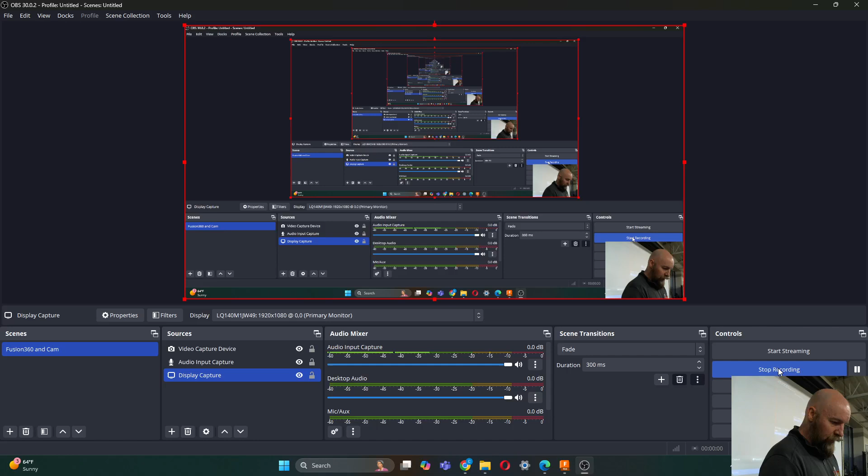Today we have a machining project in front of us. I backed a Kickstarter project and it came in the mail today. It's been a year of waiting for this thing to arrive. So we may or may not have more CNC projects in the future. I may or may not make you suffer along with me.

This is, you may recognize this pattern as the cheese grater pattern, they call it, from the front of a MacBook Pro or a Mac Pro. I think it's kind of a cool pattern, kind of interesting. And we can make it parametric for whatever kind of material thickness we have. So, that being said, let's jump in.

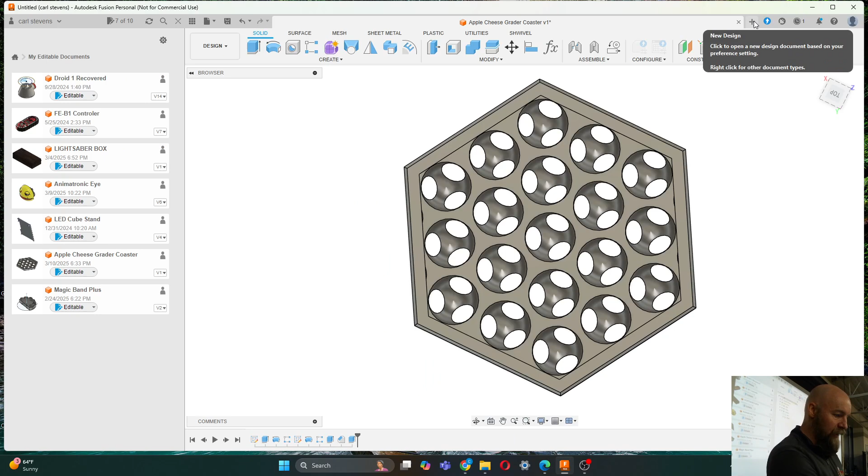I'm going to start a new document. I am going to start by making a couple of parameters, because I think it'll be helpful for us to have these right off the bat.

To make your own user parameters, you go to Modify, then scroll down to Change Parameters. We are going to make two user parameters. I'm going to click the little plus button to add a user parameter there. This first one is going to be called material, and it's just the thickness of whatever material we end up using. So I'm going to start with 1/2 inch.

And I'm going to leave myself a nice note here. It's the thickness, or maybe we should say it's the final thickness of the material, because when you're milling something down, you may start with a material that's thicker than 1/2 inch, but face it down to be 1/2 inch, so it's the final thickness of that material.

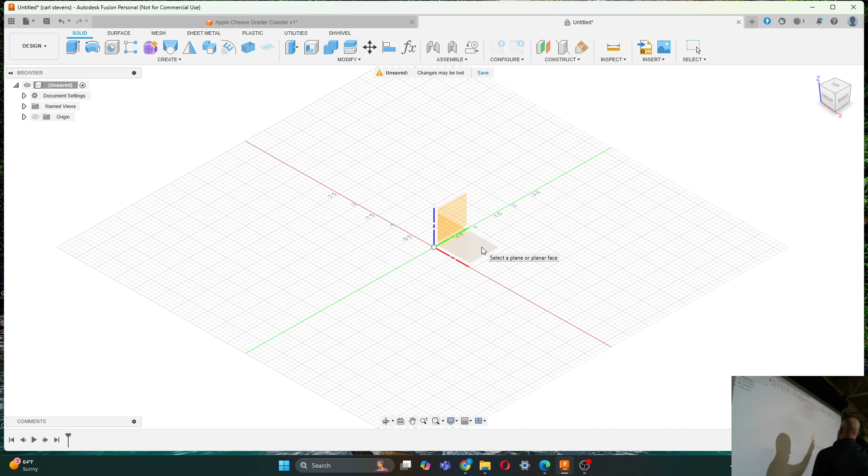When we know we're going to do things that are going to be cut on a CNC machine, it helps to orient things right away in the right direction. Your tool by default is kind of perpendicular, parallel to the Z-axis here. So if we draw on our top plane, in between our green and red axis, kind of a top-down thing, then we'll orient things in the right direction right off the bat. It'll save us a little step when we actually go to generate some G-code here.

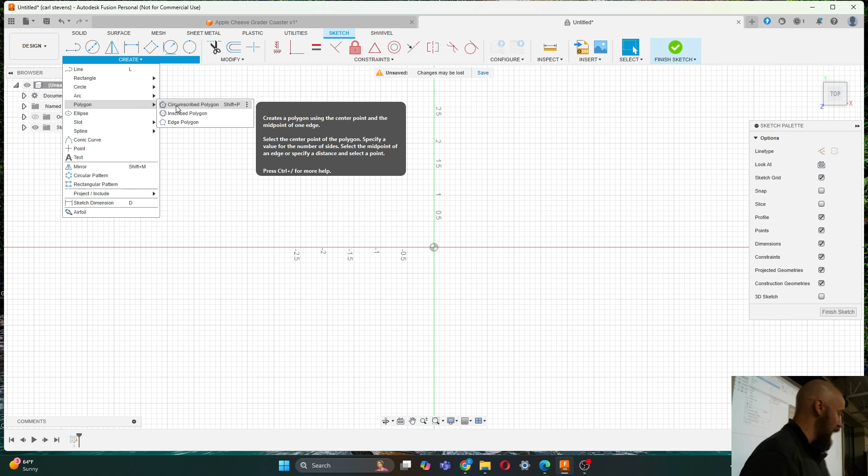All right, so now let's start by creating a polygon. We're going to make a circumscribed polygon. So we'll create polygon, circumscribed polygon, and I'm going to create the center of that polygon in the center of my drawing world. I like to have things fully constrained, meaning constrained in dimension and in location. The only way to do that at the beginning is to constrain things right to the origin there. And then the size of this, I'm imagining this being like a coaster, a cheese grater style coaster, or trivet, I guess, one of those two.

So let's make it like 2 1/4. So it's circumscribed? Yeah, circumscribed. That means there's a circle on the inside of this that is tangent to all 6 sides of our polygon.

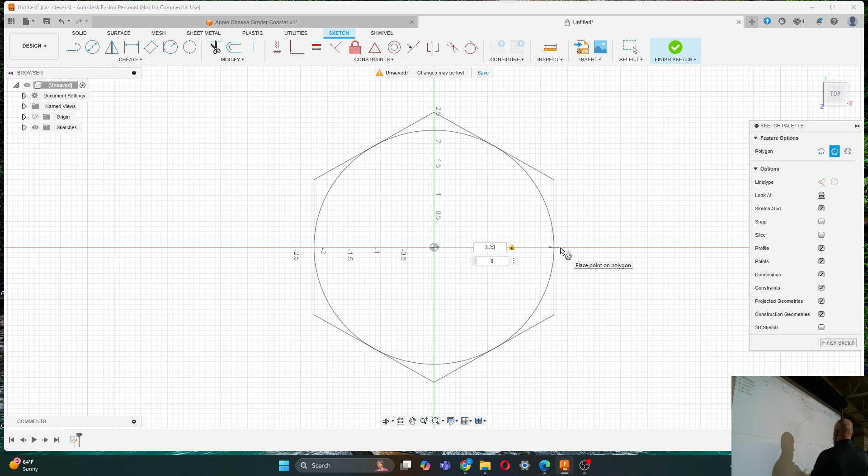The other type of polygon is an inscribed polygon. An inscribed polygon would refer to the distance between the furthest point and the center. So if we draw the circle around the outside, touching all the points, that would be an inscribed polygon. And 6 sides is indeed what is good for us.

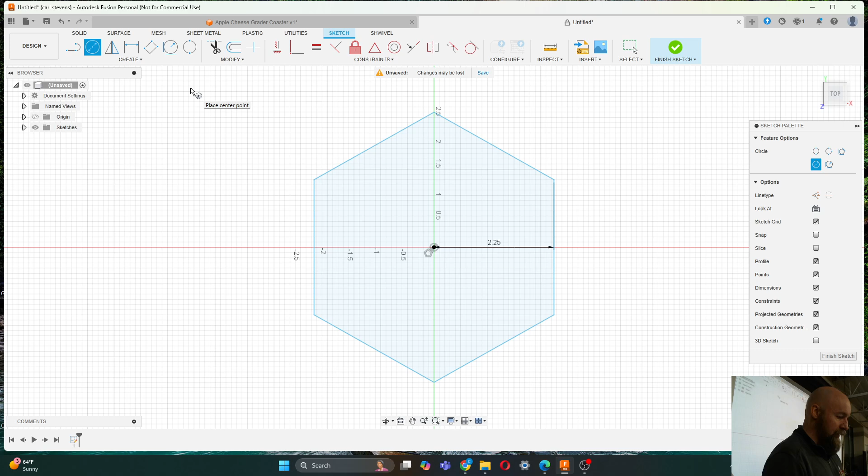And I'm going to hit enter. All right, cool. So let's, in the center of that circumscribed polygon, concentric on that center, let's draw a center diameter circle. This center diameter circle is going to be concentric on our center circumscribed polygon, so it's also going to be right at our origin. And here's where we can start driving our sketch with our parameters that we entered.

So we want our circle to have a diameter of our material times 2, minus our offset. So it's the material, and the multiplication is the star, above the 8. It's like material then star, no space. Correct, yeah, no spaces. So it's the material times 2 minus our offset.

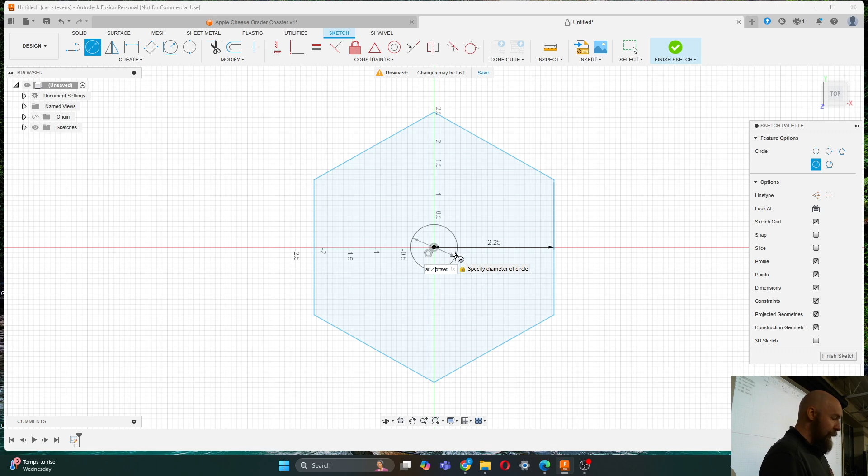The offset in this case is like the thickness of the material that's left over at the end. Maybe I'll wait to describe this until the end, what that offset actually does. And then we'll be able to push and pull it around. Cool? Yeah, so the material times 2 minus the offset. And that gives you 0.875 in this particular instance, with our material and our offset the way it is.

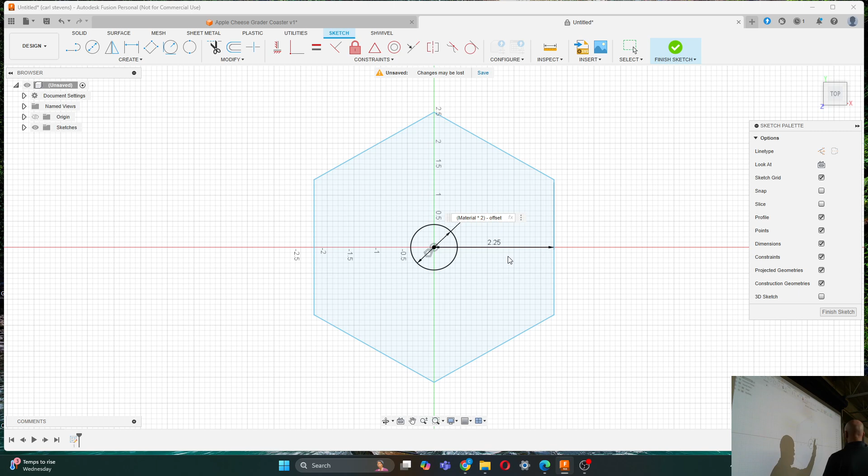But even though it says it solves that problem for you, you can double click on it and it brings you back to your equation here. You can also enter parentheses in these equations if you want to, like if you want to control the order of operations, so you multiply first and then subtract. I think multiplication always comes first anyway in order of operations, so it's not a necessity in this case, but there are cases when you want to force one thing before the other. That's not the case here—we don't need it to do one thing before the other.

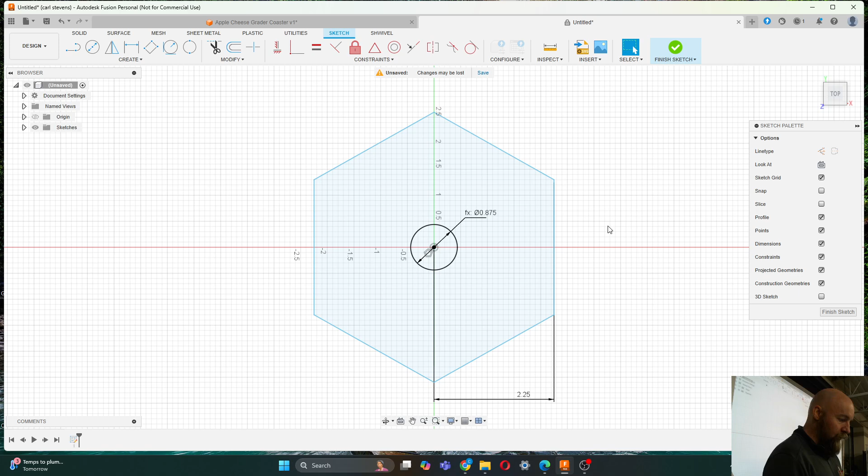All right, and then I'm going to hit enter. Now we need to draw some lines. So eventually we're going to make a pattern using this circle, a rectangular pattern, but in a rectangular pattern you can define the axes that you're going to make your pattern in, and we want to do that now. So we want to create a couple of lines that we will use in our next step to define the direction our rectangular pattern takes.

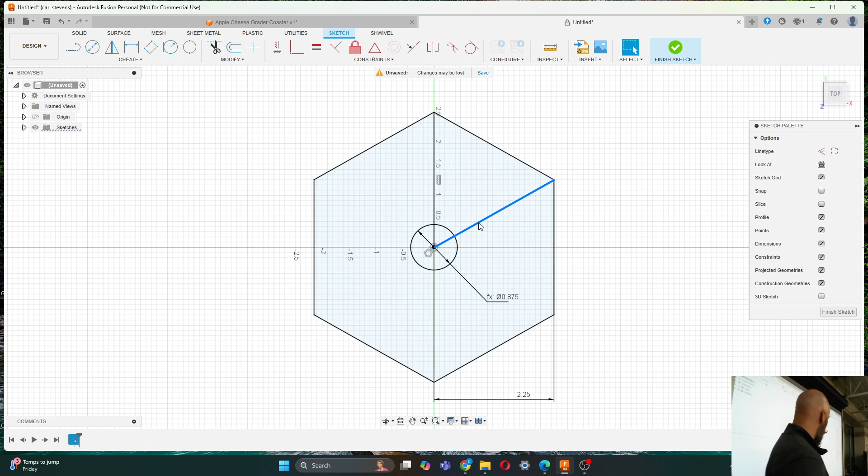So from the create menu, let's grab our line tool, and I'm going to draw two lines, one from the center point over to this corner in the right upper side there, right-ish quadrant, and then one that goes straight up to the top. And I'm going to make both of those lines construction lines because I don't want them to divide up my shape.

So I'm going to click on the line, and I can hit the X key on my keyboard, or I can click on the line and change the line type in my sketch palette over there. Over in the sketch palette, we can click that little construction button there, and that'll turn into a construction line. That way that shape is no longer bisected by those lines.

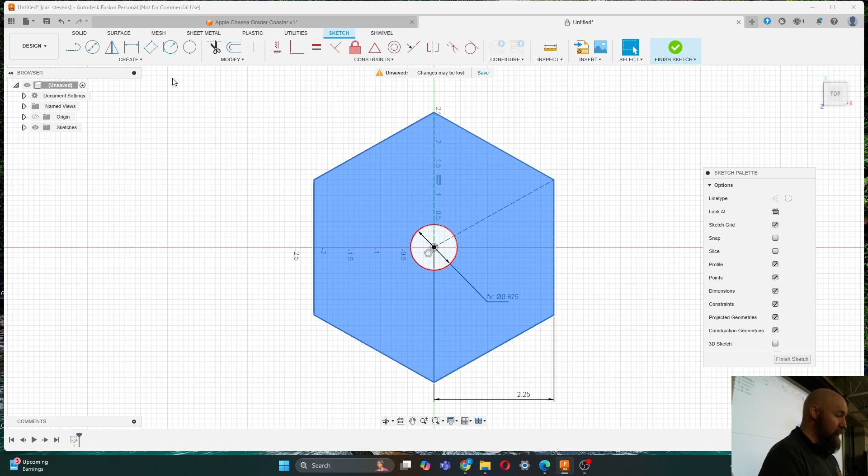Next, from our create menu, we're going to choose that rectangular pattern option. So we'll say create rectangular pattern. I'm going to make a rectangular pattern of our circle. Now you can see by default it gives you these two arrows, but we also have a select button over here, and this select button will let us choose the directions that we want our rectangular pattern to be in.

And that's our two construction lines that we drew. It's kind of a weird name to call it a rectangular pattern because we're definitely not making a pattern that is a rectangular shape right now. This is just a pattern. It's just the pattern tool, man. Don't put labels on things, man. Don't put my pattern in a rectangular in a box. Alright.

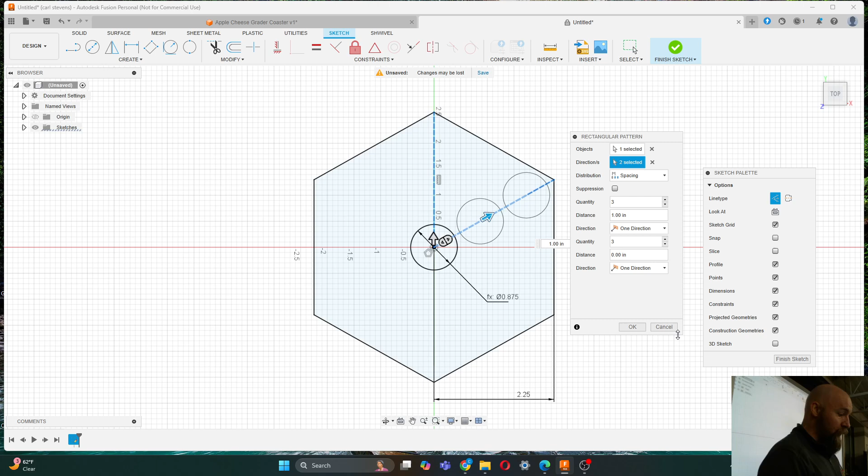So we're going to make a pattern, and here again we want to make this parametric. We want to drive everything by the parameters that we chose. So I've got my distribution type set to spacing, because we want to control the spacing between each one of these. I only need to make a pattern of 2 in this case.

And the spacing distance here, we're going to drive with that parameter we made, which was our material times 2. We're going to do that same distance for both of the directions, so it's the material times 2.

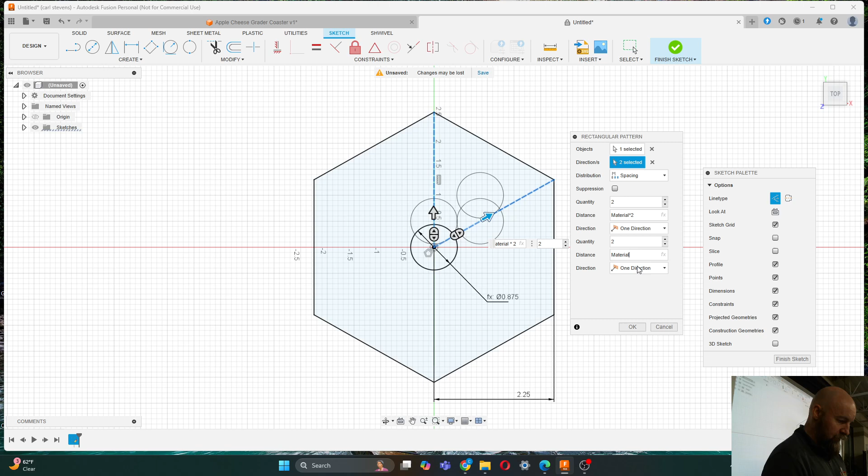Alright, and we're going in one direction. Happiness so far? So far, so good. I'm going to go ahead and say okay.

Alright, so the only reason we made this pattern is because it was the only way I could figure out how to find a point that we need. We're going to make a circular pattern on this side, and we want to make the same circular pattern on the other side, but it needs to be offset, so the center of the circle is now at the center where this triangle is here. The only way I could figure out to do this, as I was prepping, is...

I'm going to draw a triangle connecting these dots. So I'm going to grab... actually, let's try to make a triangle. I wonder if we can do that.

What about the circle thing? The tangent circle? Oh, that's a great idea. Can we make a circle that just hits those 3 points? 3 tangent circles - I've never tried to make a tangent circle with points before. Does that work? Can I? No, I can't click the points. But I don't need to, right?

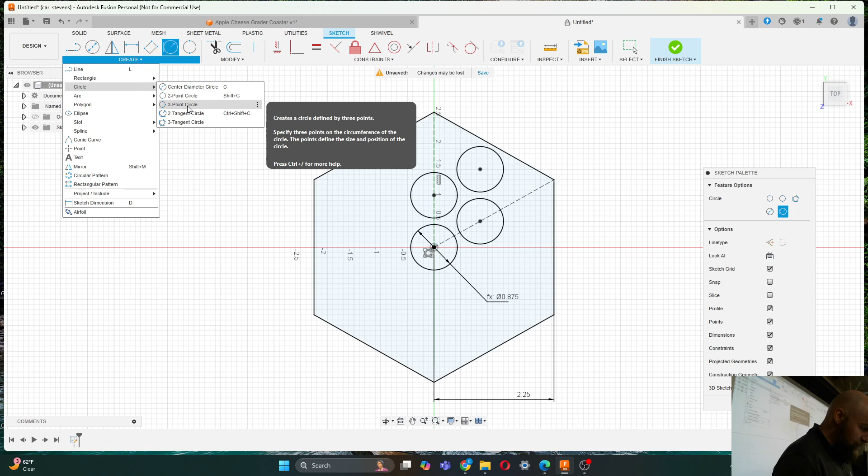So in circle, if we click 3-point circle, specify the 3 points on the circumference of the circle - the points define the size and position of the circle. Love it. So if I choose that point, and that point, and that point - yeah, beautiful.

Let's make that circle a construction line, because we really just need the center point, and we just need the center point for the other side when we eventually draw the other side.

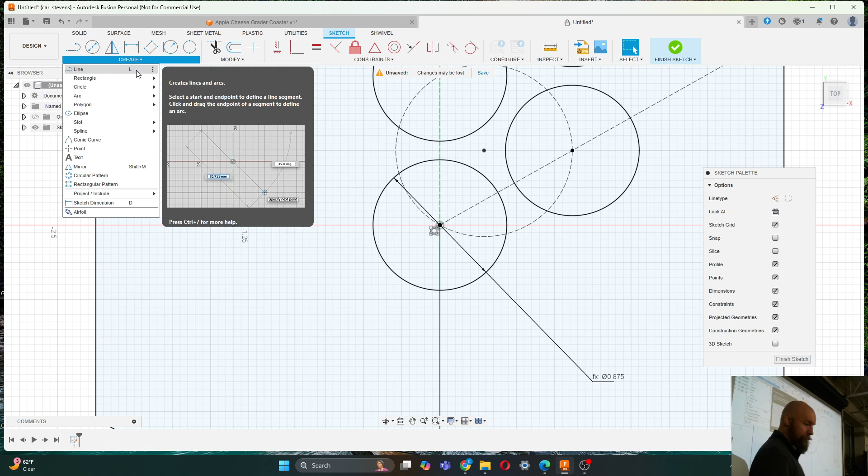Okay cool, the last thing we need to do here is we need a line that divides this center circle in half. The way I've been doing this when I need it is I grab my line tool and I draw a line that is definitely not down the middle of this circle.

But I do have my horizontal/vertical constraint popping up, so there are 3 things that I know about this line. I know it's always going to be connected to the top, to this circle up here. It's always going to be connected to the circle down here, because I've got that little blue X. And it's always going to be straight vertical. So those are the 3 things I know about this line I'm drawing right here.

Now I can click and drag on this line. In theory I should be able to click and drag on that line, but it won't let me for some reason - there we go. I click and drag on the line, and those 3 rules I was telling you, I can verify that they're true: it's staying straight up and down, and it's staying connected at the top and staying connected at the bottom.

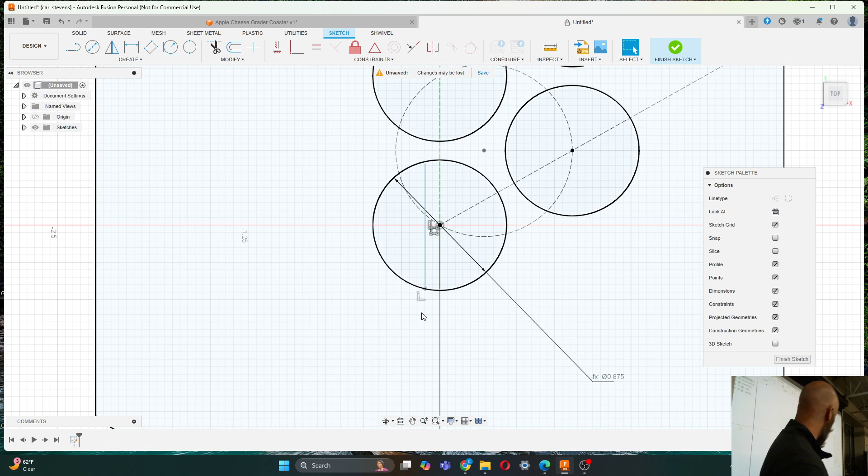But I want it to go right through the center, so I'm going to take this line here and add a coincident constraint. From the constraints menu, if I choose this coincident constraint, and pick the line I want to be coincident to, and the point I want it to be coincident to - now I get a line that perfectly divides the circle in half.

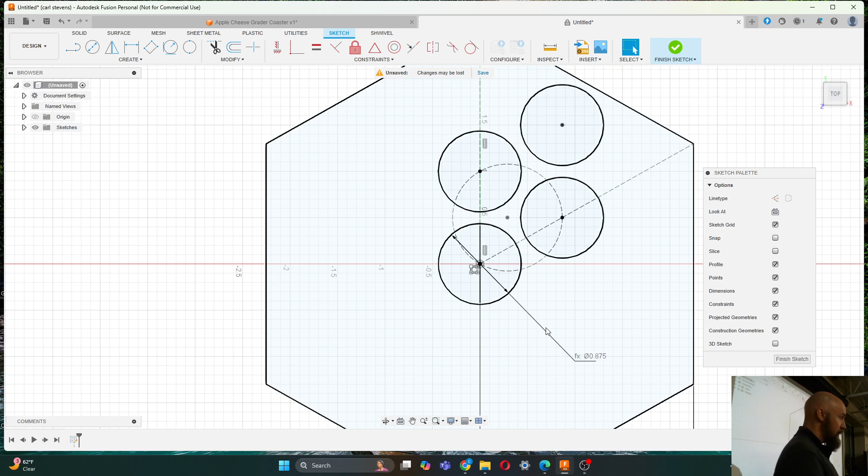Sometimes what I would do is draw a line from the center point down and make sure the line is straight vertical, then draw another line from the center point up and make sure that's straight vertical, but now it's just one line. Many ways to skin a cat, but that's the method I've been using recently.

Alright, questions so far? Cool, alright, I'm going to say finish sketch.

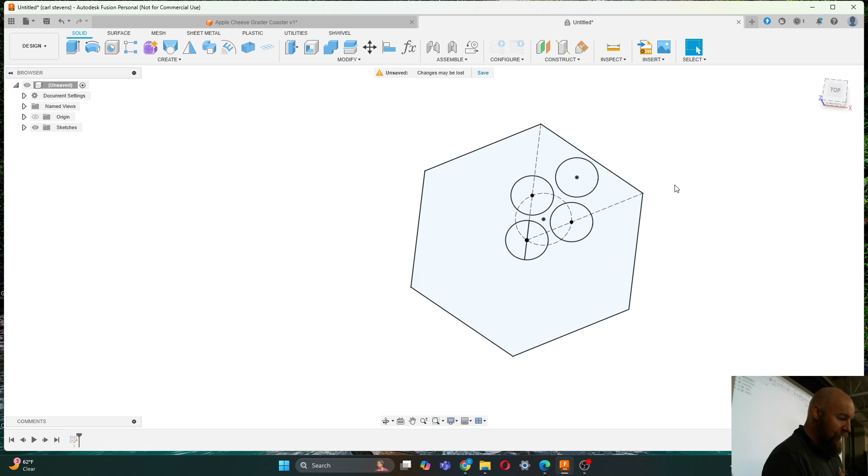So now let's extrude out our shape. From our create menu, let's go ahead and grab the extrude tool. We're going to extrude everything, so I'm just going to box select this whole thing.

And we are going to extrude this. I want to extrude it away from myself because I want to have this sketch... I guess it doesn't matter. As long as we draw our next sketch on the opposite side of this body that we're making, then we're good.

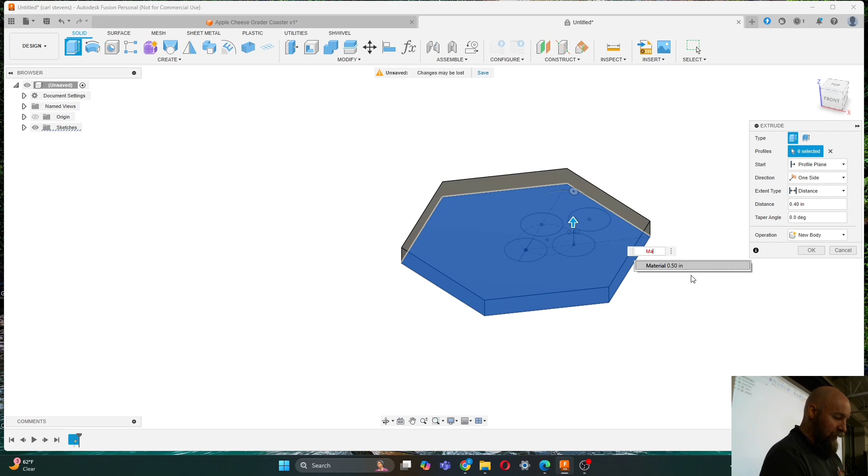And our body is going to be a thickness of material. We're making it a new body. And again, it doesn't really matter - you can go negative material or positive material, either one is fine. And then I'm going to say OK.

All right, so let's create our funky pattern on this side before we flip it over and do the other side. From our create menu, let's go ahead and grab the revolve tool.

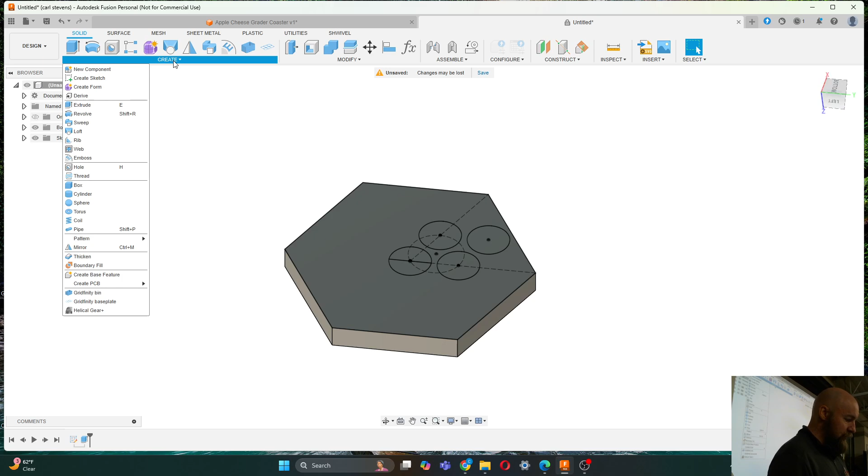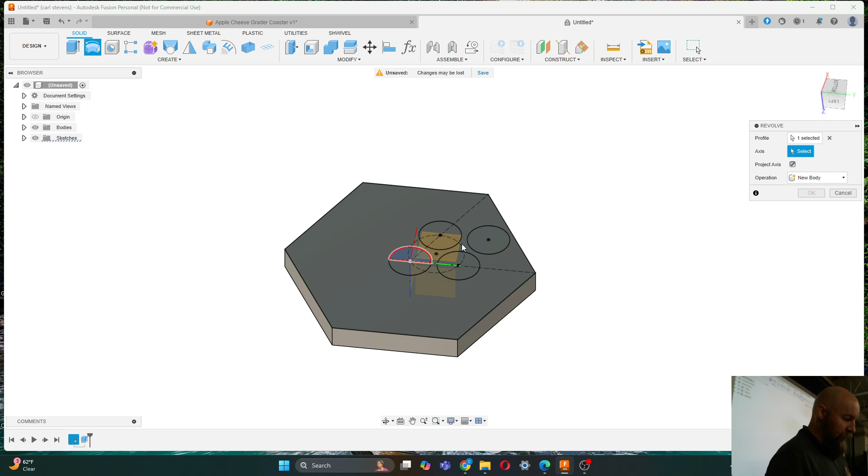The profile that we are going to revolve is going to be half of our circle that we cut in half. And the axis that we're going to revolve it around is our line that we used to cut that thing in half.

And here, I can look at this sideways now, and you can kind of see this distance here - this is our offset. So if we would have just done the material times 2, this circle would come down and be tangent to the other side of the material, and we want that little bit of thickness spacing left in there. So that's our number that we can play with to make that thinner or thicker.

All right, and I'm going to say we're making a cut.

Are you good? You just lost me. Oh sorry, yeah, here - hang on, I have the bottom of the thing.

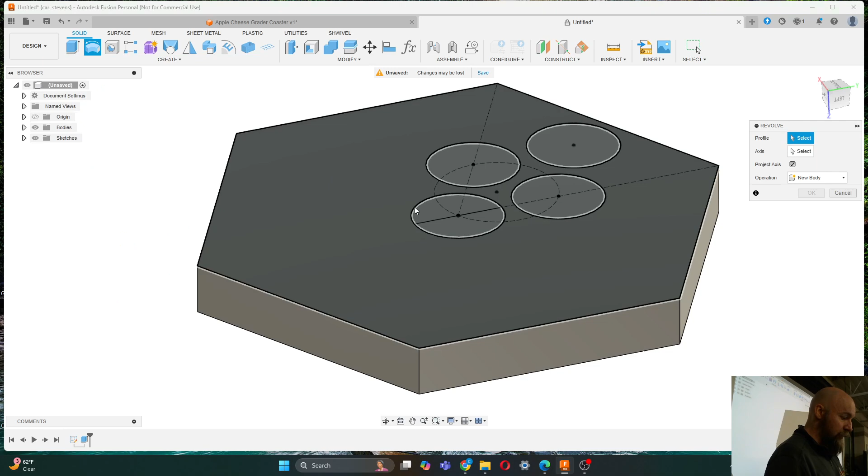So then we go to create, and then revolve. Create, revolve, fine. And then I pick half of my circle... an axis. And then the axis is going to be that line that divides our circle in half. And then as long as we're cutting, then we can say okay.

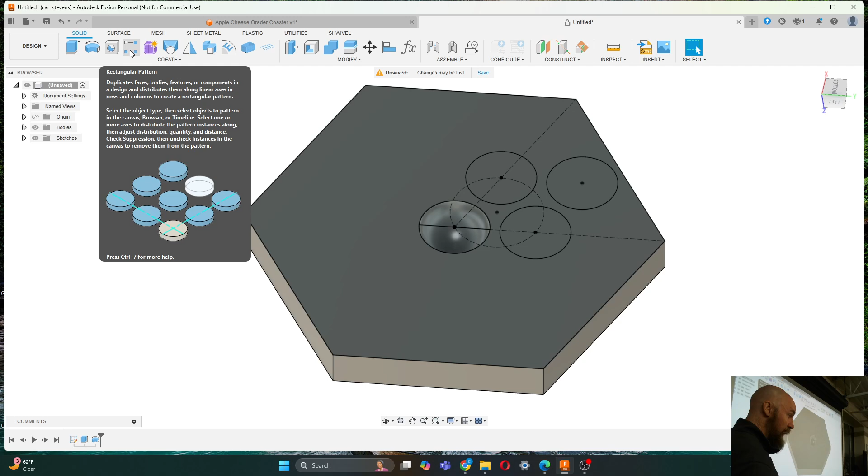And it is definitely my preference to use the pattern tool out here in 3D land versus using the pattern tool in 2D land, because when I use the pattern out here in 3D land, I get an icon that appears down in my timeline. And when I can make an icon appear down there, it gives me something I can edit later, because I'm definitely going to change my mind - it's just how it works, right? So if I can do things that give me points down here in my timeline that I can control later, I would always choose to do it that way.

So from our Create menu, I'm going to grab my Pattern tool - again, it's the rectangular pattern tool. We are making a pattern that is an object type of features. A feature is the thing down here in our timeline. So this is our feature timeline down here at the bottom.

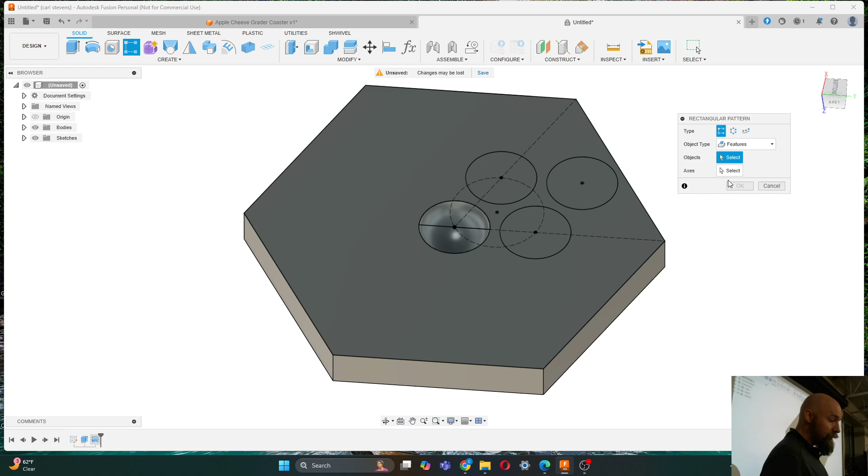You can attempt to pick the feature by hovering your mouse over your drawing view out here and trying to highlight the feature you're going to click on. You might have to hide your sketch in order to do that. But I prefer to pick the feature in the timeline down here, so I want to make sure I'm picking a feature down here. Sometimes when you pick a feature out here, you may not be picking all the features - you may just be picking some faces of the feature.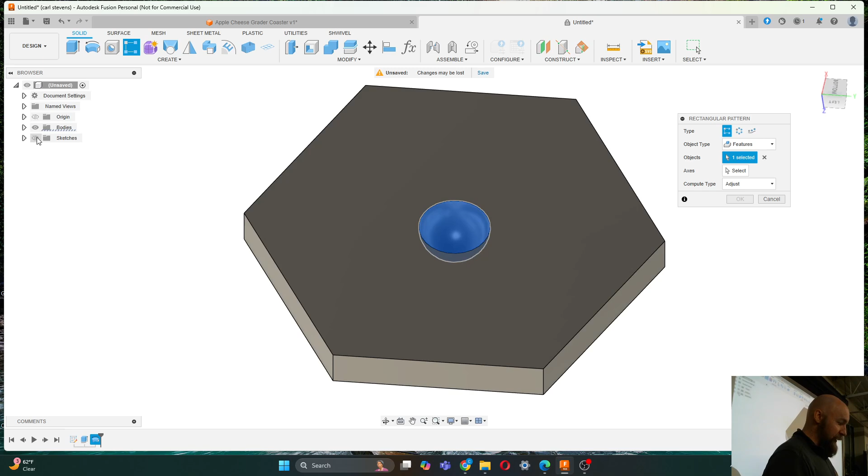So I prefer to pick the feature I'm making a pattern of down in the feature timeline here. And then I'm going to turn my sketch back on because I need to see these lines, our construction lines that we made, because we're going to use them again as the axes for our pattern. So if I click on axes, and I choose those two lines as the two construction lines as the direction I'm making my pattern in.

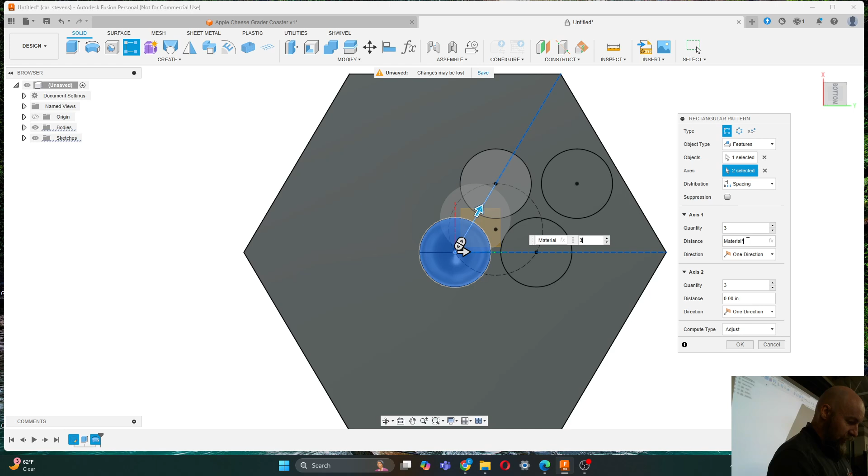Our pattern distribution type is set to spacing as opposed to extent. We want to be parametric about this, the same way we made our pattern to begin with, where we set a distance that is based on our material times 2. That is going to be the distance for both directions of both our axis 1 and our axis 2.

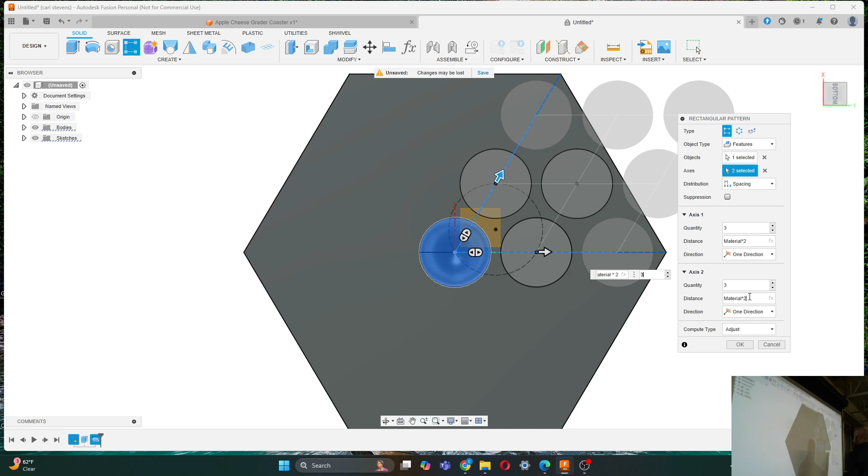Right now this pattern is kind of shooting off towards one side, and we actually want to make the pattern over this whole thing, the whole kit and caboodle. So for the direction of each axis, we set a quantity, a distance, and a direction. Our direction is going to be symmetric for both, and that'll expand our pattern outward as we add more quantity. I think I have to go up to 5 on both of these, and that covers my shape.

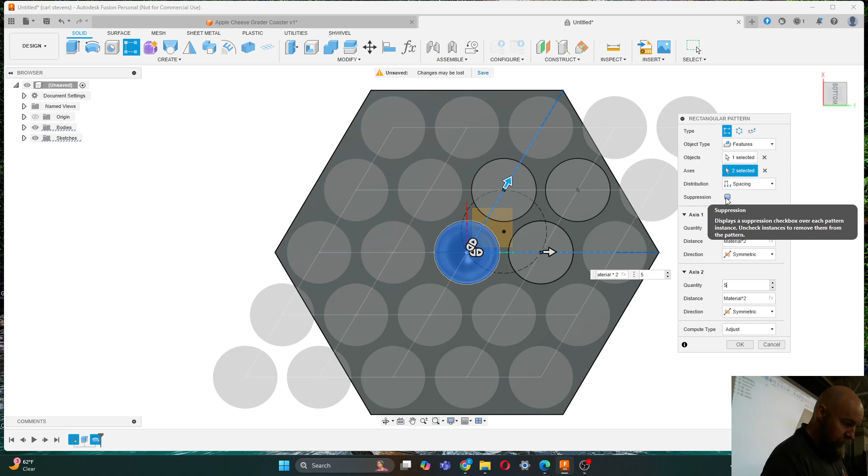You hit the suppression button. I did not, I actually don't know what that checkbox does. What does that checkbox do? That lets you turn off some of the examples. Oh cool, hey we should do that, because we don't really need these out here, we don't really need these out here either. In fact, maybe we want to try to avoid making little cuts away. I've never done that before, I've never even noticed that suppression checkbox over there. Neat, I'm learning stuff today, you guys could come up here and teach.

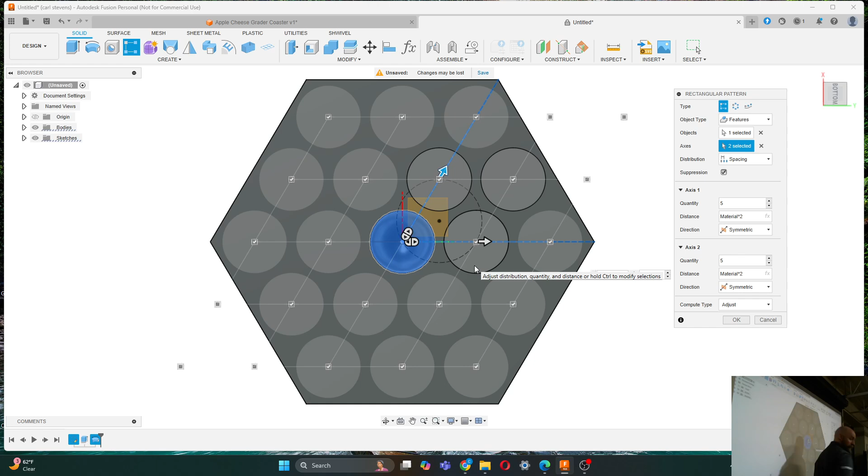If I say OK, I'll mention before I say OK - sometimes when you're making a pattern and you click OK and go back and look, you're like, where the heck did the pattern go? I can't exactly tell you what this compute type does, but sometimes when the pattern fails, you still get an icon down here that it thinks it succeeded, it makes you a little pattern icon, but the pattern doesn't actually show up. You can come back and try changing your compute type from adjust to something else, like optimized or identical. Sometimes just changing the compute type will make your pattern successful if it fails. It worked for me, hopefully it's working for you guys too. Two thumbs up, cool.

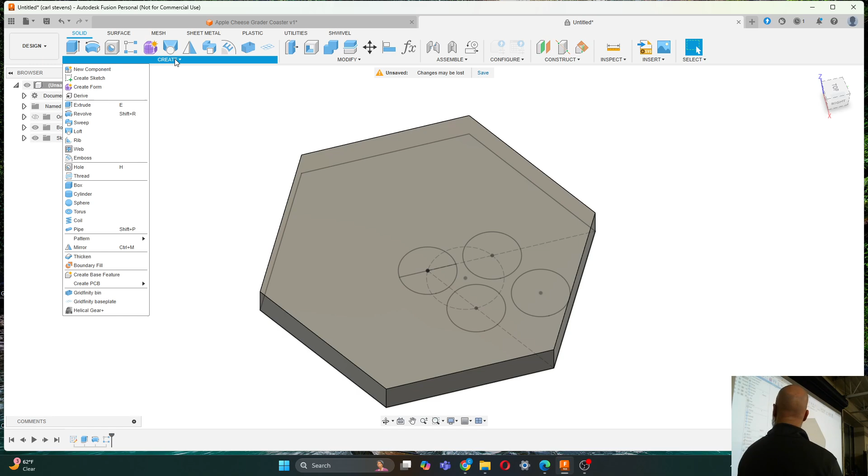Now let's make this pattern on the other side. I'm going to rotate my body around so I'm looking at the side of my shape that does not have a pattern on it. There's no pattern on this side, there's no sketch on this side. From my create menu, I'm going to create a sketch on this opposite face, right on the face here.

I need to bring over some geometry from the other sketch onto this sketch - primarily and only this point that we made that is in the middle of our little triangle of our three pattern circles over here. So from the create menu, I'm going to grab the project option, project include, and then over to project. I'm going to hover over the little dot that is the center of that construction circle, and it'll highlight red. If I click on it, it turns purple and tells me in my project window that I've got one selected there. Then I'll say OK.

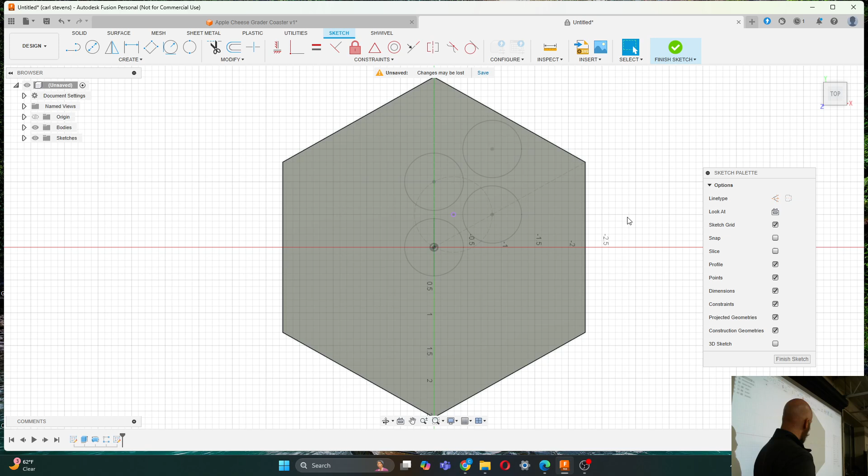Now the only thing we need to do on this, we need to do two things I guess. We need to draw a circle, so we're going to make our center diameter circle, and that center point is going to be right on that point that we projected over. We're going to make it the size that is material times 2. Then I'm going to hit enter.

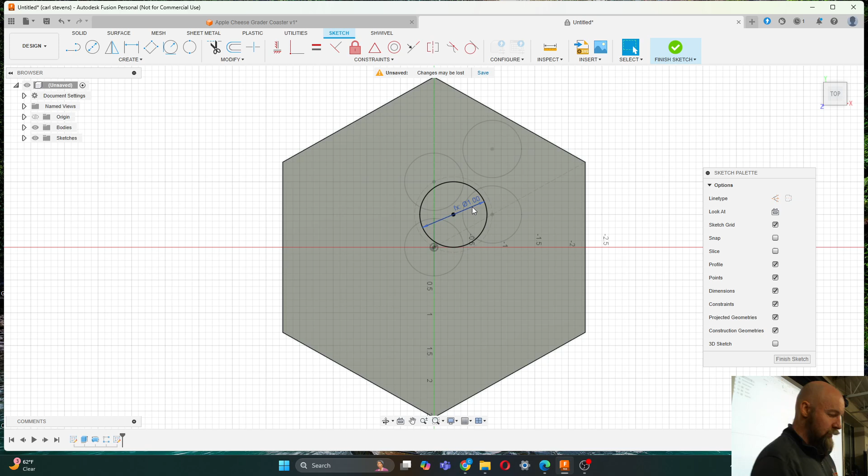Then we just need to do our trick where we divide our circle in half, because we're going to need to revolve this again. So we need a dividing line that cuts it in two. I'm going to grab my line tool. Yeah, times 2.

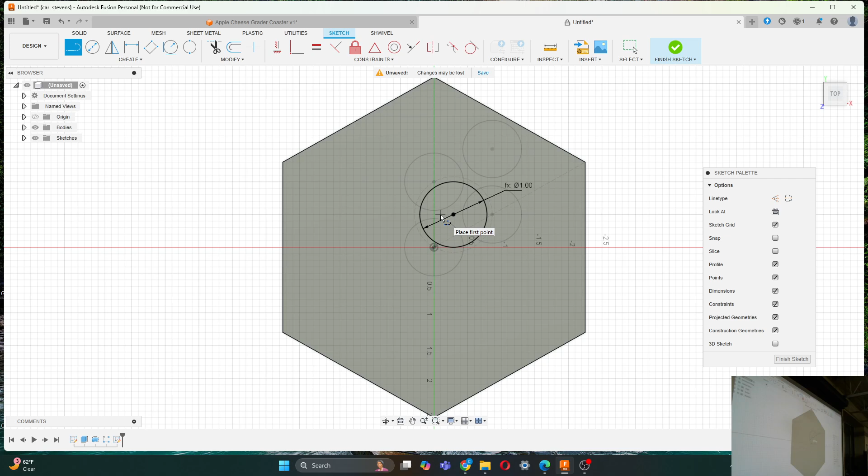And then we just have to divide our circle in half here. So I've got my line tool. I'll zoom in so we make this nice and big on the screen. Might as well take advantage of all that screen real estate.

I've got the little blue X, that's telling me I'm going to add a coincident constraint. So I'm making this line, the end point of this line is going to be coincident on this circle here. And then if I move my mouse down, here I get the two other constraints I'm looking for. I get my horizontal vertical constraint, and I get my second coincident constraint.

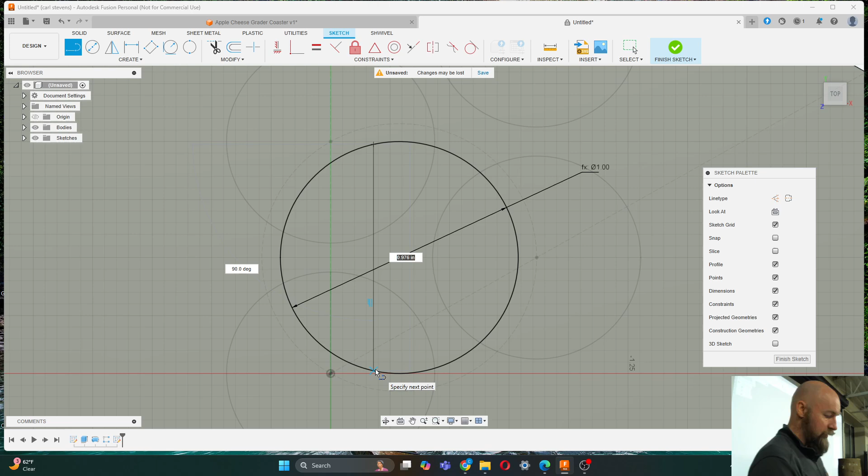And now I can take this vertical line and give it one more coincident constraint that says it's got to be coincident on the center point of our circle. So, constraints, coincident.

Here's this line. The construction line - no, we actually want it to be a solid line. Yeah, because we actually do want it to divide our circle in half, because we're going to revolve right around this line. All right, and then I'm going to click Finish Sketch.

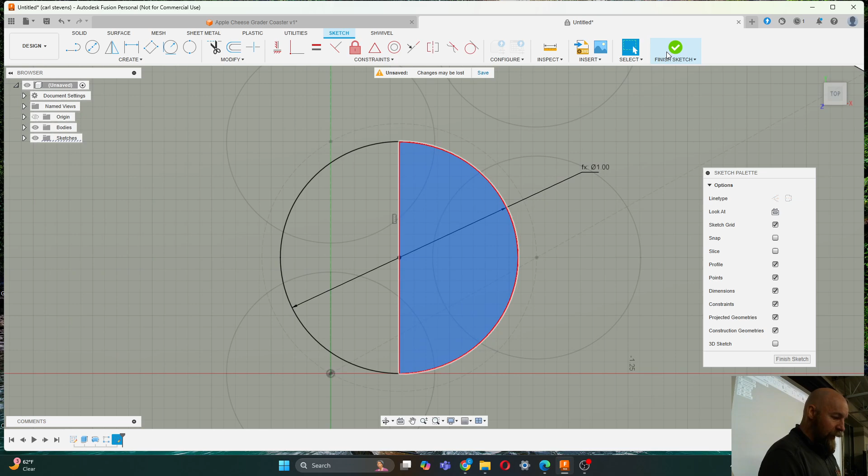And I'm going to kind of zoom out here. Oh, you know what, I made an error. Let's go back and edit that sketch. I was wrong about our size.

Our diameter of our circle is not material thickness times 2. It's material thickness times 2 minus our offset. Because if this was the full material thickness, it would be tangent on the other side to the other side of our circle, and we want that minus - we want to shrink it in just a little bit by that offset amount.

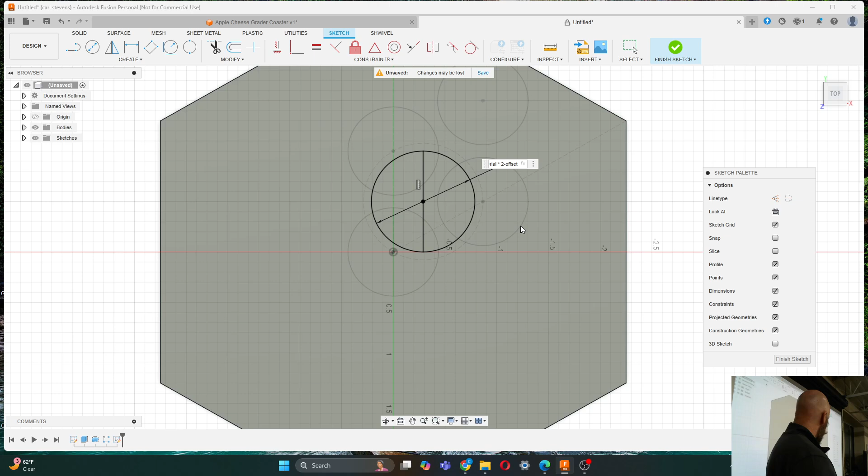All right, cool. Sorry, all right, now we can say Finish Sketch. And now we can go up to our Create menu and choose to revolve this fun circle into a sphere-like object,

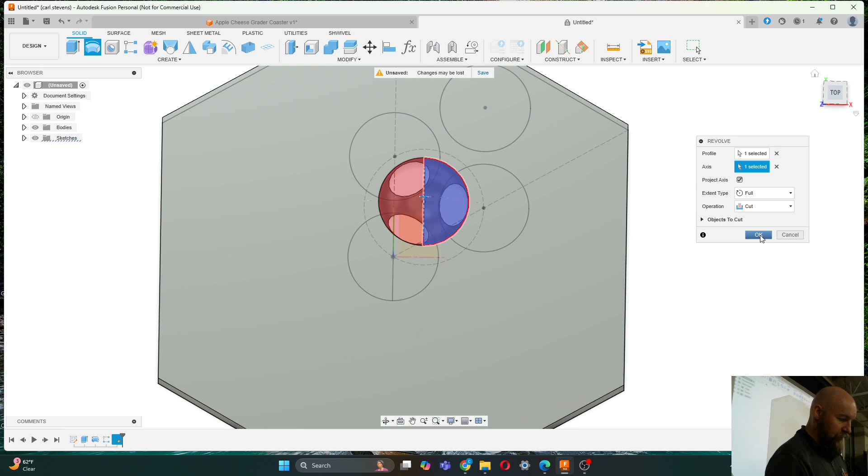or a cutting object that is a sphere. So we're making a cut there, and you can kind of start to see what's happening there. It's lined up nicely on our other circles, which is cool. You can start to see it cutting away.

And now from our Create menu, we can grab the Pattern tool again, our rectangular pattern. And we're going to make a pattern of features again. Rectangular pattern. The feature that we're going to make a pattern of is that very last revolve that we did.

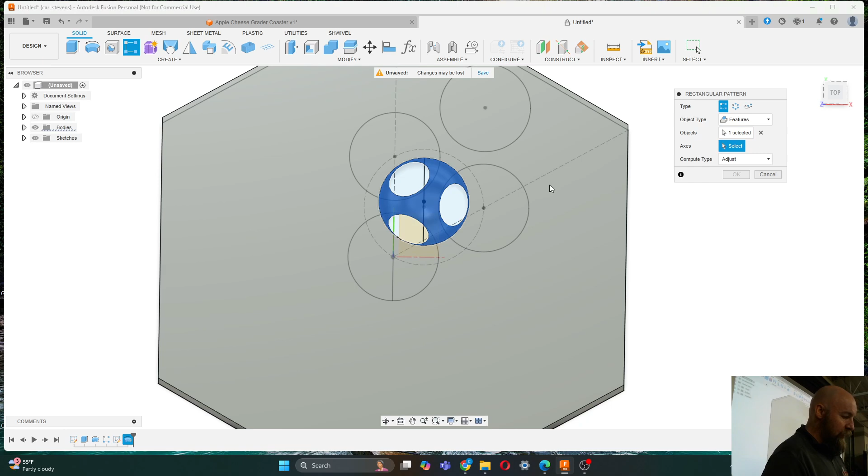So there's our revolve, and then the axes that we're going to use are going to be those same axes from our sketch on the other side. And it'll let us just choose those as our lines that we're going to make our pattern in, even though they don't really touch this object at all. They don't touch the feature, but it'll still let us use them as our lines there.

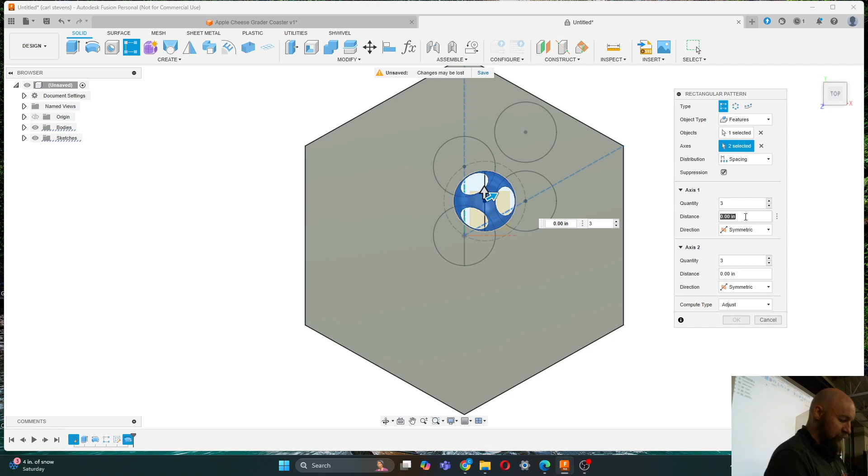And then again, we're making a distribution type of spacing. We're going to make it symmetric. And the distance is going to be our material times 2.

And then I just need to turn up the quantity here to 5 again. Actually, we need more this time around, because we actually need - do we need 6? Maybe not, maybe that's fine. You know, we can always add more later. That's the beautiful thing about the pattern tool down here, is it's super easy to edit. So I'm going to leave it at 5, and we'll see how that turns out.

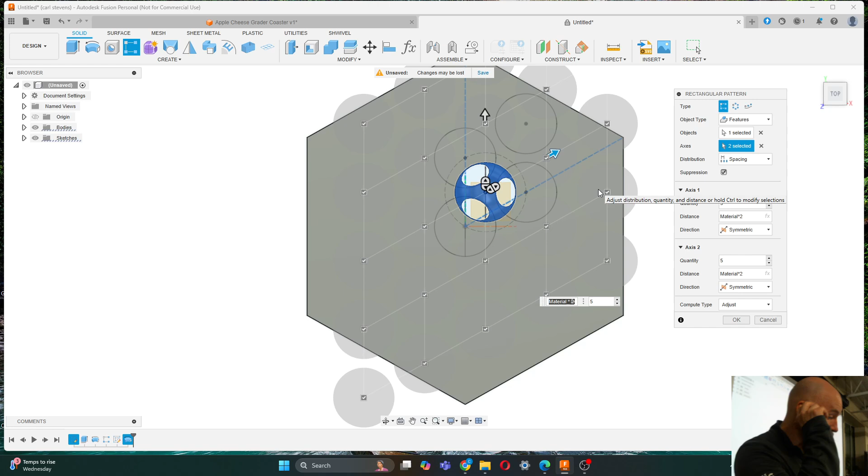I'm going to turn on my suppression checkbox, because I can turn off some of these that I don't want. I kind of want to see what it's going to do. Again, this is a nice thing about it being editable, but I think these ones that are really near the edge, that kind of overlap the edge, I think we're not going to want these. So anything that sticks out over the edge,

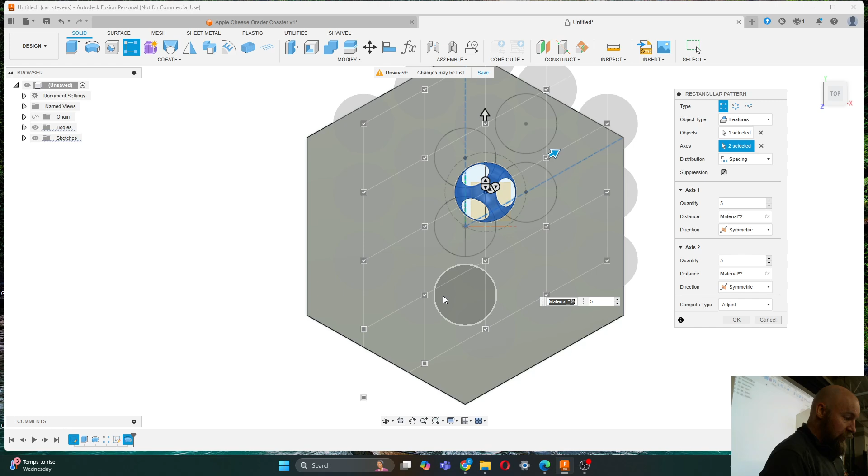we're not going to want to use. So I'm going to suppress anything that pops out over the edge. And again, this gives us a feature down in our feature timeline, so we can always come back and turn these back on.

But if I say OK here, yeah, then that's starting to give me a pretty cool pattern. And I think that I like that with it.

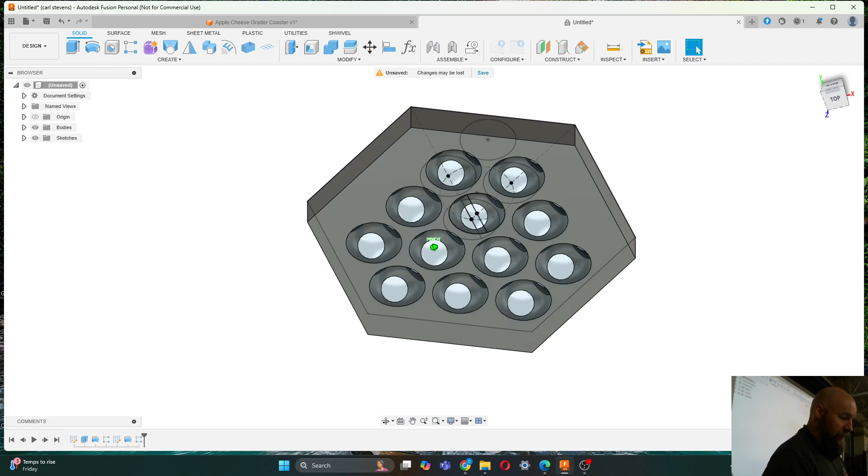You know, from this side it still looks pretty nice, even though our pattern kind of dies off here at the end. That doesn't really bother me. And on the other side, we can call this the back, I guess I don't like that as much. But again, I can come back over to my feature down here in my feature timeline.

I could right click on it and say edit rectangular pattern, and try turning on some of these. Like I could turn on both of those and go, oh no, yeah, I definitely don't like it when it does that, when it cuts off the edge. I'd rather have none of them cut off the edge of whatever shape we're making here.

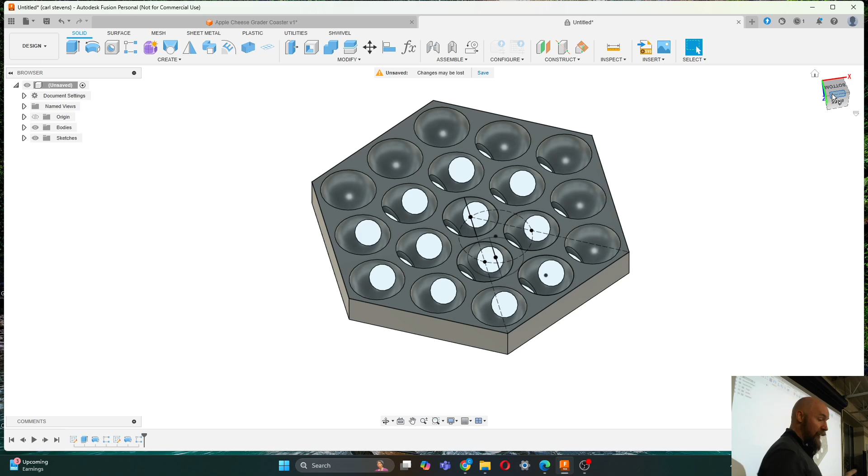In my opinion, I like this better. And I'm going to say OK. And if I flip around to this side, this would not be a very good Apple knockoff if we didn't add some gratuitous chamfered edges.

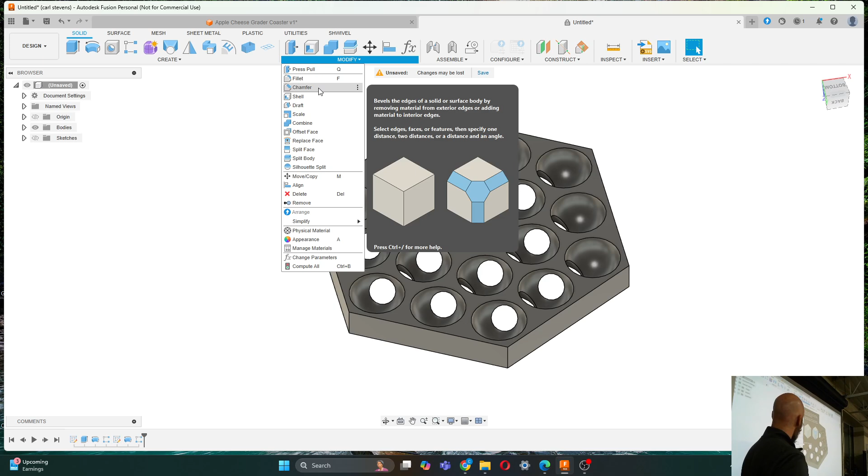So we definitely are going to do that now, before we finish here. So I'm going to come up here to my modify menu and choose chamfer, and I'm going to pick these edges.

I'm actually going to pick the edges on the other side too. Because this has to be a two-sided machining operation, we've got to flip it over anyway, so we might as well chamfer both the edges.

And I'm doing 0.05, but you can give it the amount of chamfer that makes you smile. And then I'm going to say okily dokily.

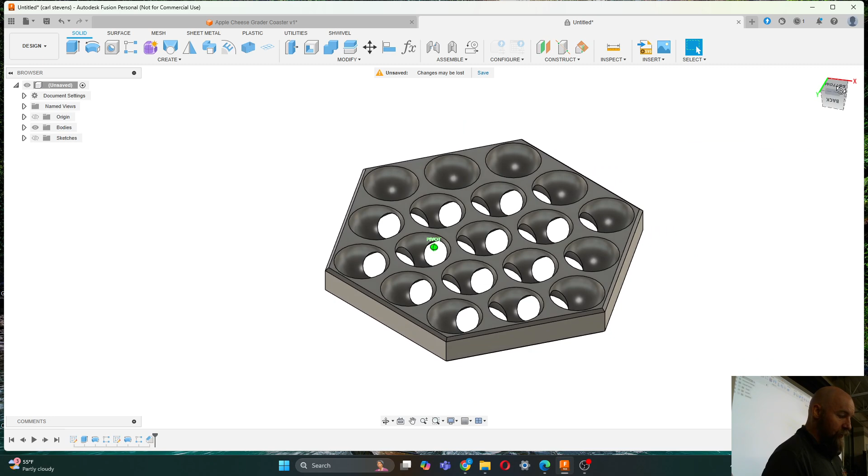Now we have 15 minutes left. Should we jump over to the machining side for our last 15 minutes? We won't be able to machine all these pockets, but we can do one of them.

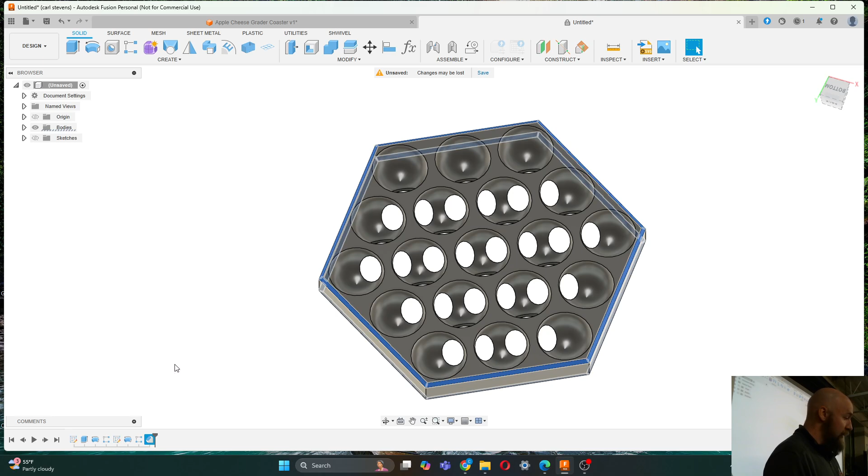Machine a pocket? So, okay Carl, could you cover the chamfer up? Oh yeah, again? You got ahead of me. I'm sorry. And on the pattern, my computer was telling me to flake off and die, ha. So I had to stop and restart a couple times.

So I added the chamfer just in the modify menu. I went and said, hey, add a chamfer. On which side? I added it on both sides. So I added it to the 6 edges on the top, I'll call it, and to the 6 edges on the bottom, because we got to flip it around anyway. So I figured I might as well add that chamfer all the way around.

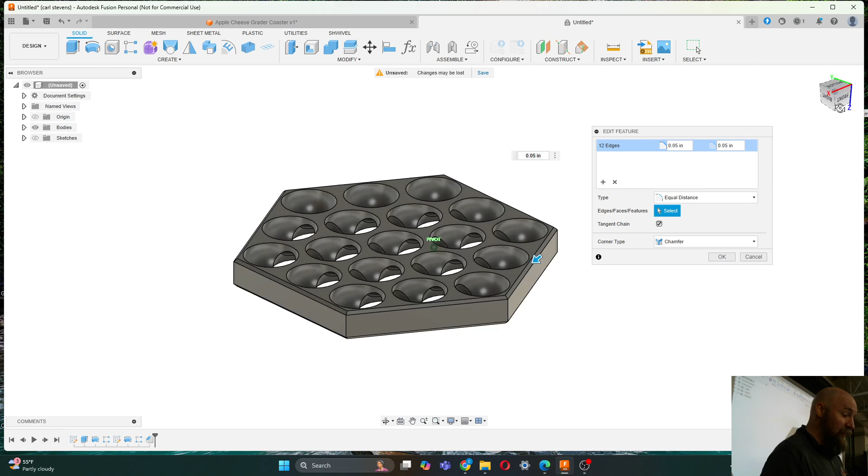And I made it 0.05. 50 thousandths is like not a round number in imperial measurement. I don't know, but it seems like it looks pretty good. You could do like 0.03 too, right? It just needs to break that edge a little bit, just a slightly broken edge.

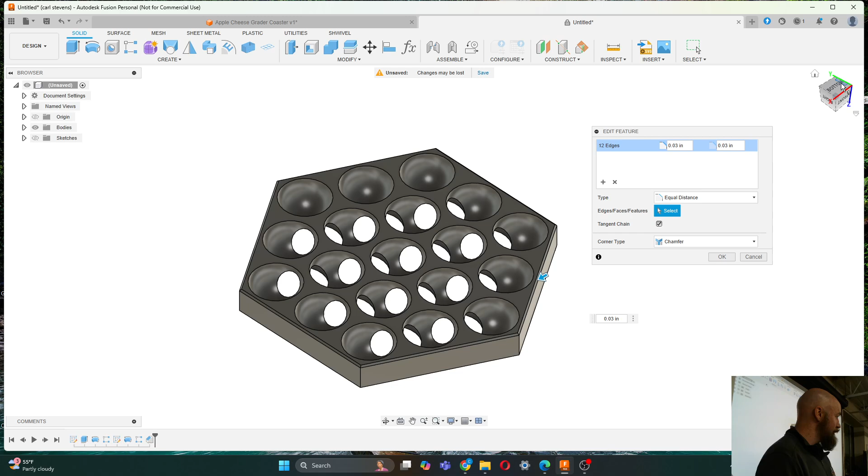Yeah, and there is indeed a lot of geometry going on here, so it wouldn't surprise me if computers slow down a little bit while you're doing this. Once you've gone around and selected all 12 edges, then you can say OK.

And before we go over to that machining area, let's mess with this a little bit. This is, like I said, in theory parametric, right? So let's say, hey, Apple does not use 1/2-inch stock to make the front of their Mac Pros or whatever.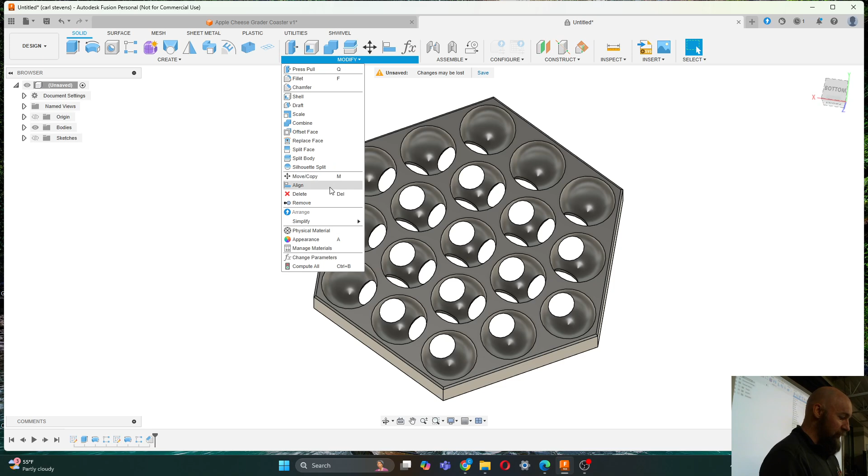So if we come up to our modify and come down to our change parameters thing here, let me make this smaller so we can kind of see what's going on while we do this at the same time, because we actually don't need to say OK in the box before it does a thing.

So our offset, if we change our offset, you know, if we just change it a little bit, we can see it update right away. So you can see the holes shrunk in size a little bit. If we make our offset 0.05 or 0.15 instead of 0.125, those holes get smaller. If we make them 0.18, they get a little bit smaller.

If we make our offset less than 1/8 of an inch, so like 0.1, these things start to get pretty spindly, right?

Because now we've only got 0.1 inches between the tangent point of this circle to that face on the other side, there's some dancing you can do changing that offset to dial in the look you're going for. You can also just change this material right on the fly.

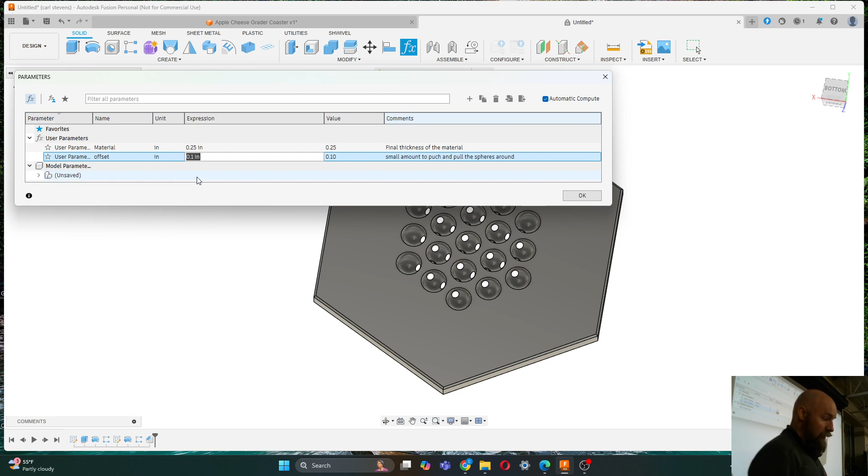So I could make this 1/4 of an inch instead of 1/2 of an inch, and you can see that changes it quite a bit. But it also changes this offset up, so the same offset, when it's half the thickness, needs to be less, which is kind of why we needed that second parameter there.

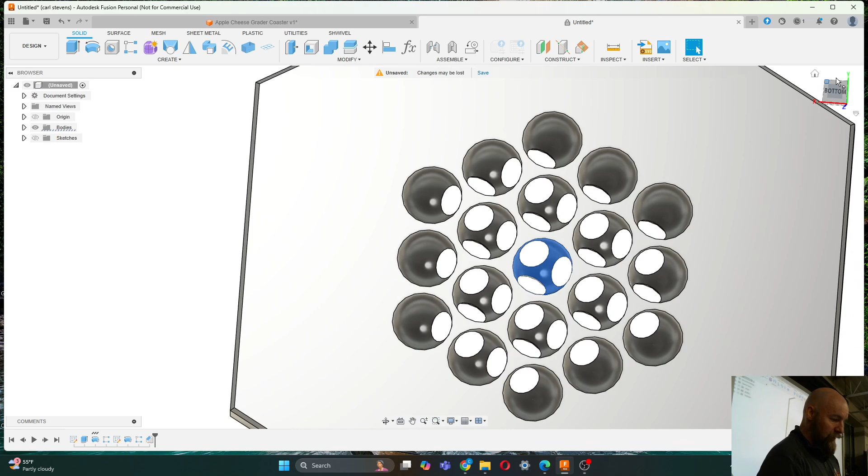You'll also need to add more pattern if you want to make it this thickness, but there's not a whole lot of meat left there. If this is a 1/4 inch piece of material, if I highlight that and look at this sideways view, you can see how close that's getting. That's our 5/100ths of an inch right there, thickness between the bottom of that circle and the other side. So it's kind of fun, you can push and pull these parameters around.

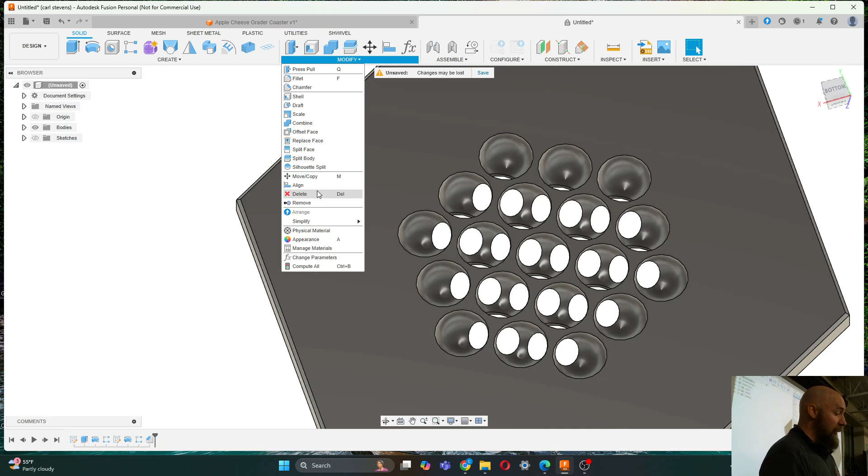We could have, in our patterns here, edit rectangular pattern—I don't know how this would work with the suppression, but here we've got a quantity set. This could be a parameter if we wanted to, like this quantity of 5 in each. Since we're driving the thickness of our material and the overall look with parameters, we could have a user parameter that is that quantity.

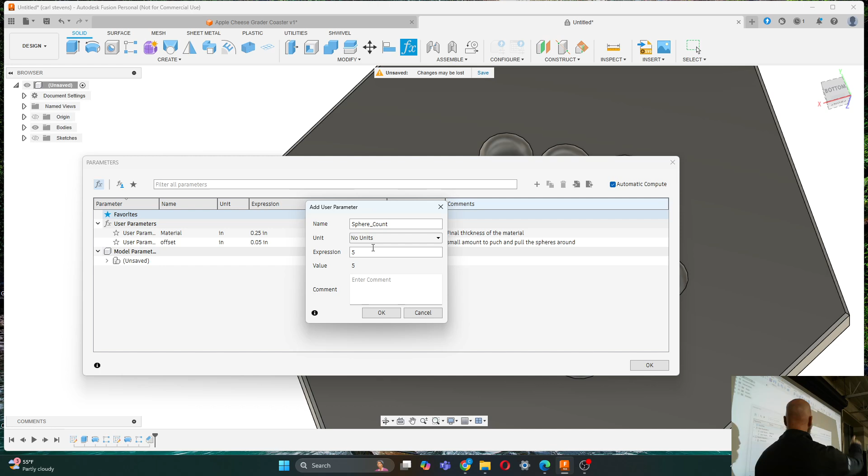So if I make a user parameter here, you want your user parameter to be the count, or the sphere count. In order to use this expression as a quantity as opposed to a unit of number of inches, we have to change the units to no units. If you don't have no units here, it won't let you use this sphere count as your quantity. You gotta have it set to no units. And then we could have both of our patterns use this sphere count parameter.

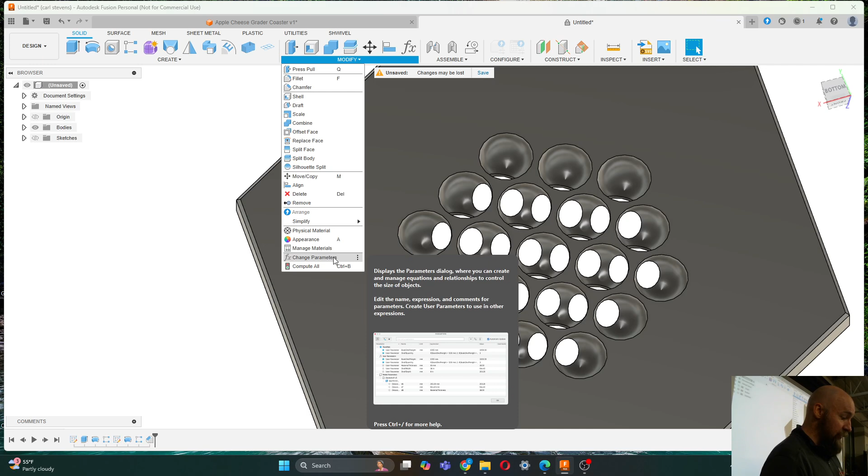And you guys don't necessarily need to follow along, I just kind of wanted to illustrate that you can have this thing driven completely now by your user parameters. So now we don't need to edit anything when we want to change anything about this.

I can change this to 10. Oh yeah, so I think the reason it's making a weird pattern now is because we've got this suppression thing on. So it's suppressing in a pattern, which is kind of interesting—or maybe these are the 3 that I had suppressed initially. So when I changed it, those 3 are still suppressed, but the others are not.

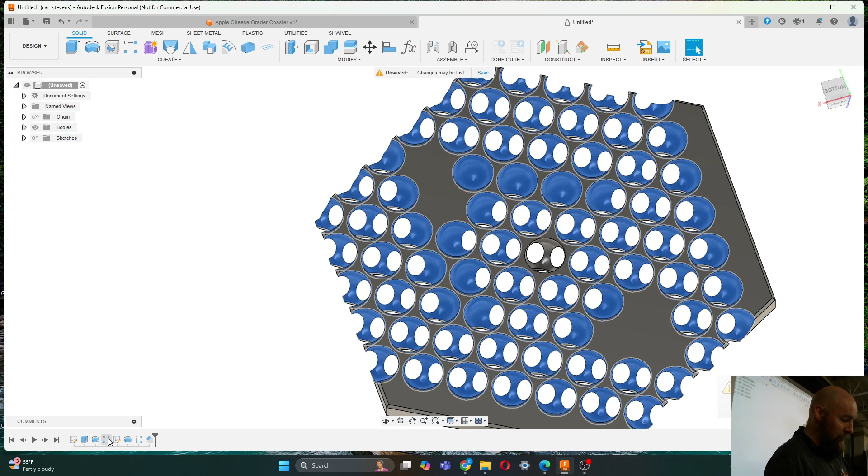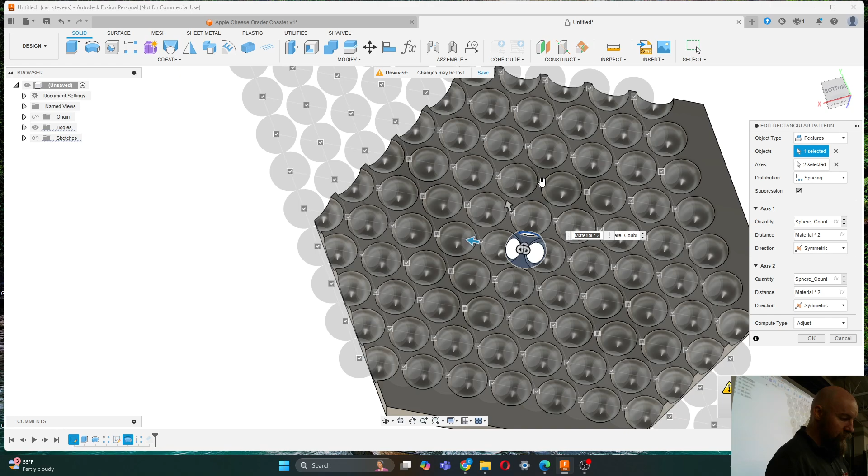So we do have to—we can turn off suppression. Does that work? Oh, it doesn't work. I had to switch mine to adjust. Yeah, so for some reason, when you turn suppression back on, it definitely wants you to come back and add these guys. So maybe with that suppression, it's hard to control things parametrically. I still have a bunch of these things that are turned off.

So I guess there is some editing you would need to do when you go to change your material thickness and add a lot more of them or subtract a bunch of them. Because now there's a whole bunch over here that I gotta turn off if I want to make my pattern work out nicely. So still some manual work, but I'm going to do Command Z a couple of times here—there we go, and then we get back to the thing that we drew.

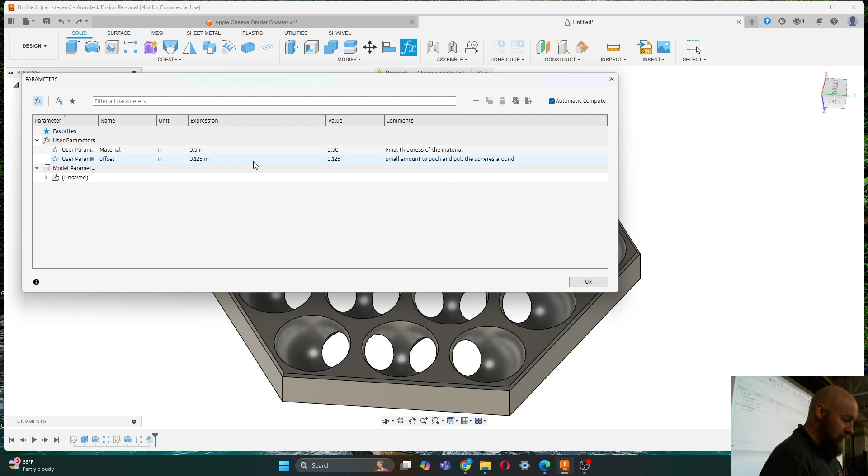But we can also change my size too, and change parameters. I can change my material thickness, I can go up to like 0.75, right? And again, same pattern, just a little bit different. Cool, there we go.

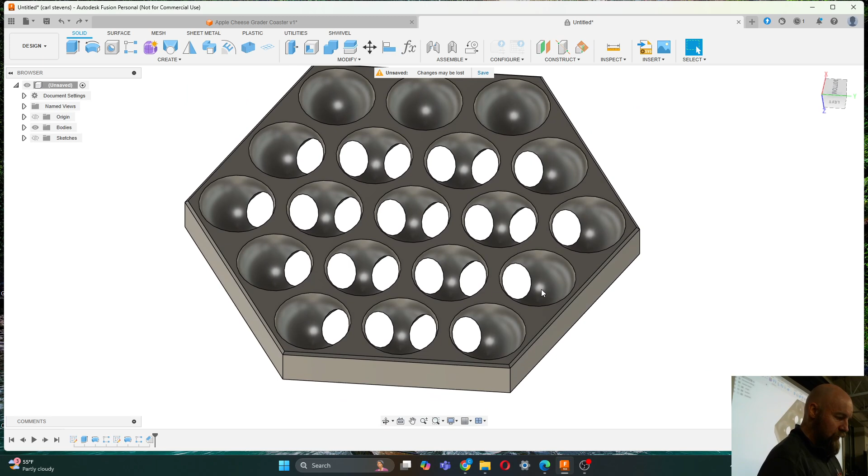I won't force like the rushed 15-minute cam thing—people love it when I do that, but it doesn't do it justice. Eventually we'll get into cam, or maybe I'll do a weekend class or something more than an hour, like a 3-hour Fusion intensive or something. If that sounds like fun to you, I'm sorry.